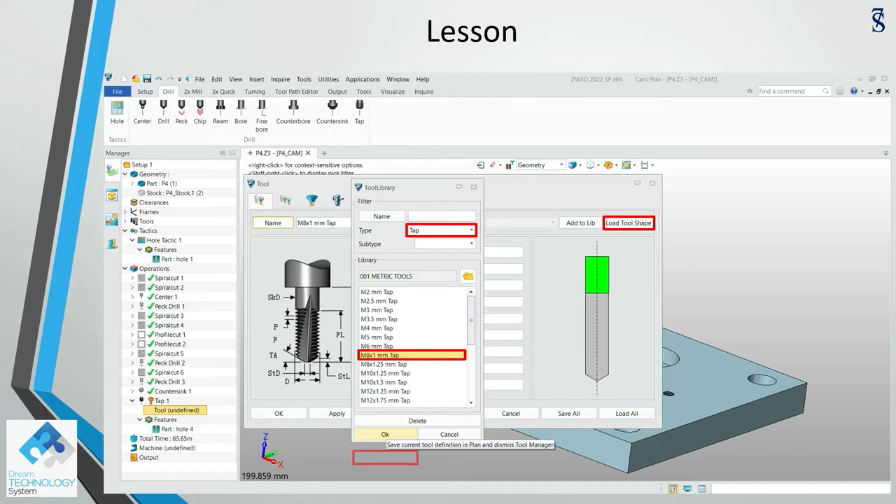Load the tool shape, select tap, and then it's M8 times 1 mm tap. Update the tool number, click OK.

We go for edit the parameters, right mouse click. Sometimes it will pop up this way, or maybe you just go into the update mode by itself. Set the frame, G54, update the RPM. You can see the feed rate is set by itself because we are doing tapping.

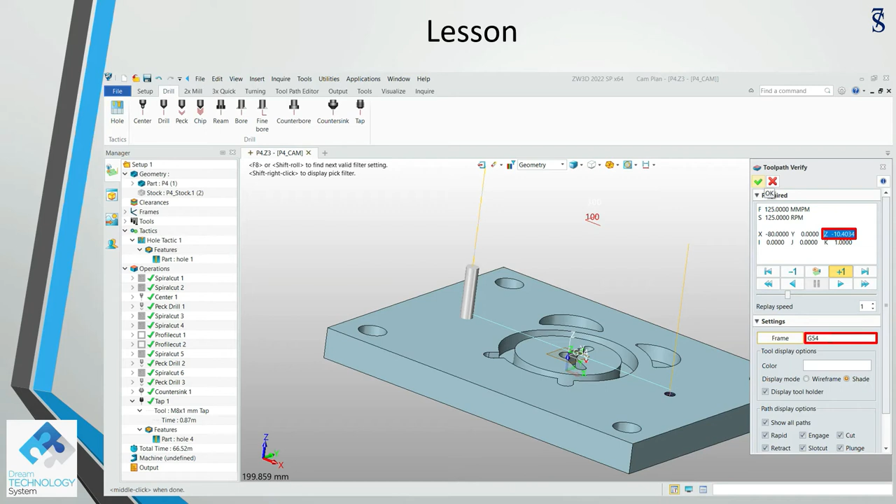Change the color. Calculate. Looks good. Let us verify, set the frame G54. You can see the Z is minus Z 10.4, which is correct. Click OK.

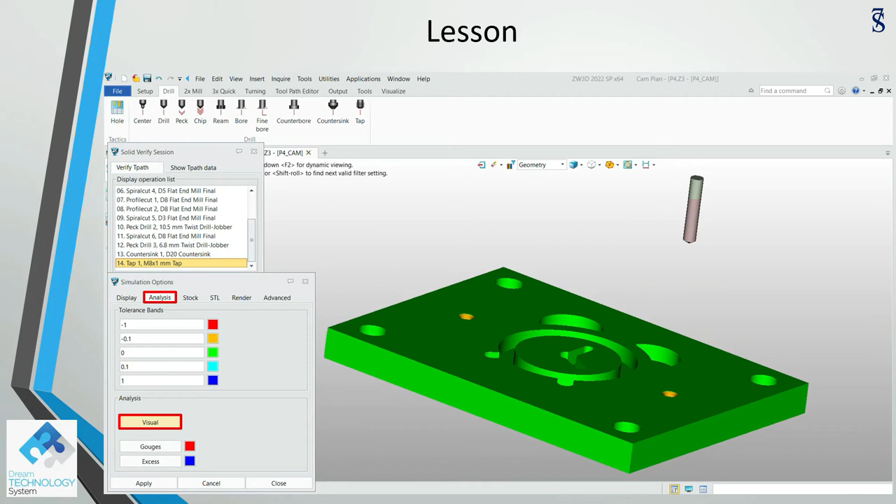Let us click OK again and perform a solid verify. Looks good. Let us do an analysis. Yes, you can see the color changing, because the hole is drilled at diameter 7 and the tap is diameter 8.

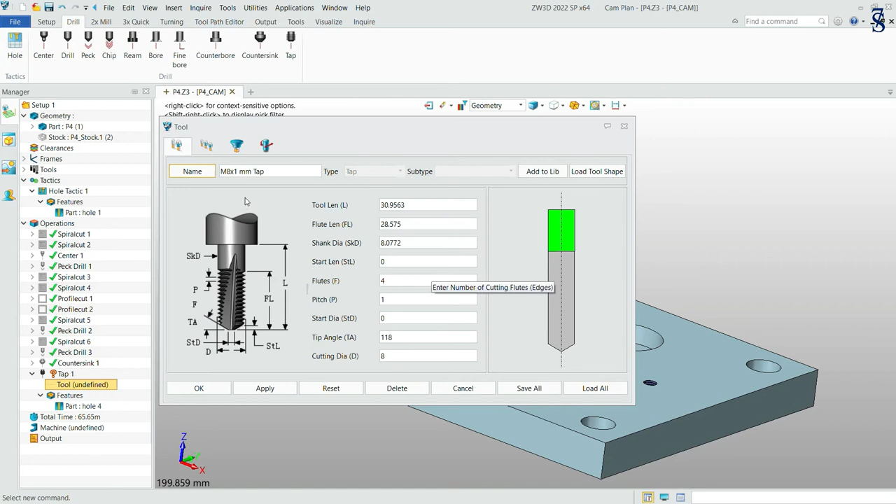M8 times 1. Set the tool number, 12. Calculate, no. Set the frame, G54.

RPM, 125. Change the color, this one. Let us calculate. Looks good.

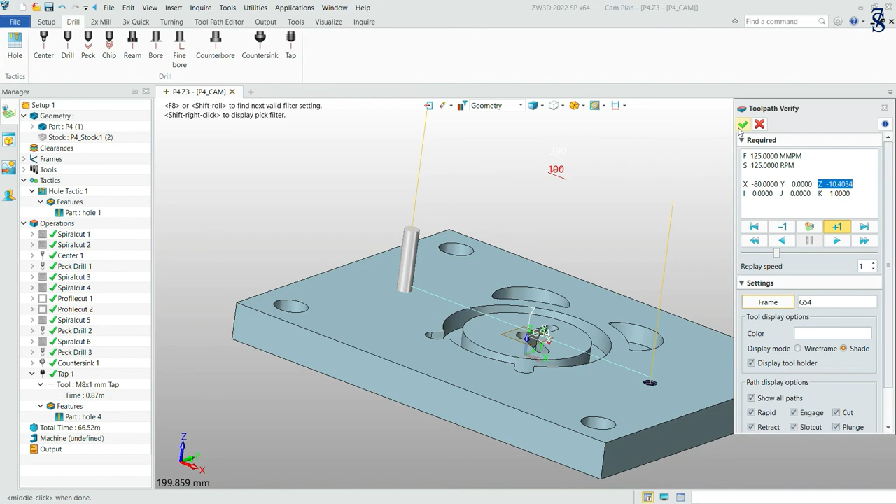Verify, set the frame G54. Yes, we can go step by step. Z minus 10.4, which is correct.

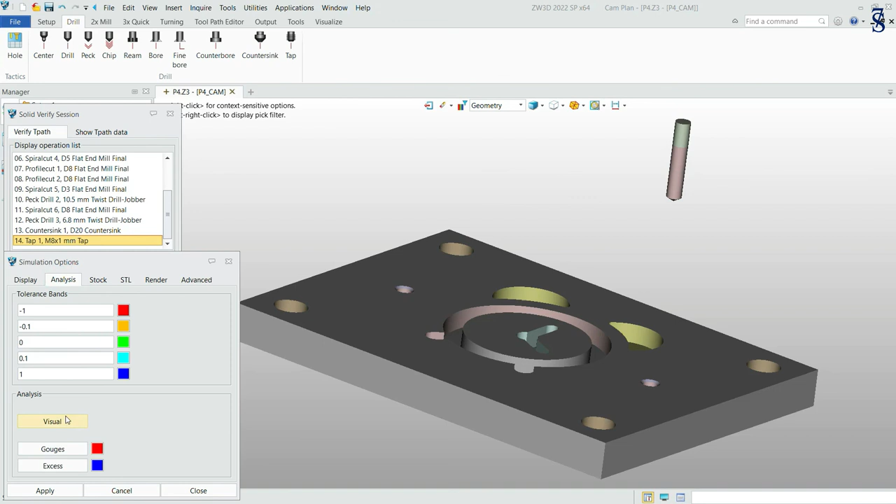OK, OK again, let us go into the solid verify. Reduce speed. Play. Options, analysis, visual, you can zoom in. You can see the tap hole is done correctly with the depth, as well as this one.

OK, close. We save the file.